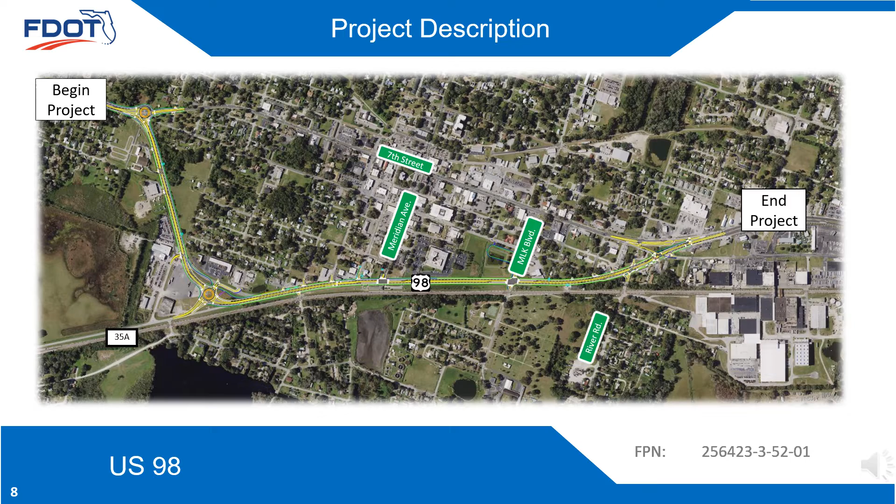The Florida Department of Transportation, FDOT, District 7, is proposing first to widen US-98, also known as the Dade City Bypass, from 2 lanes to a 4-lane divided roadway between 7th Street South and 7th Street North. Access to driveways and local streets will be maintained using similar connections to what exist in current conditions. The improvements necessitate converting the existing undivided typical section into a divided typical section, which includes incorporating new access management standards to promote safety and operations.

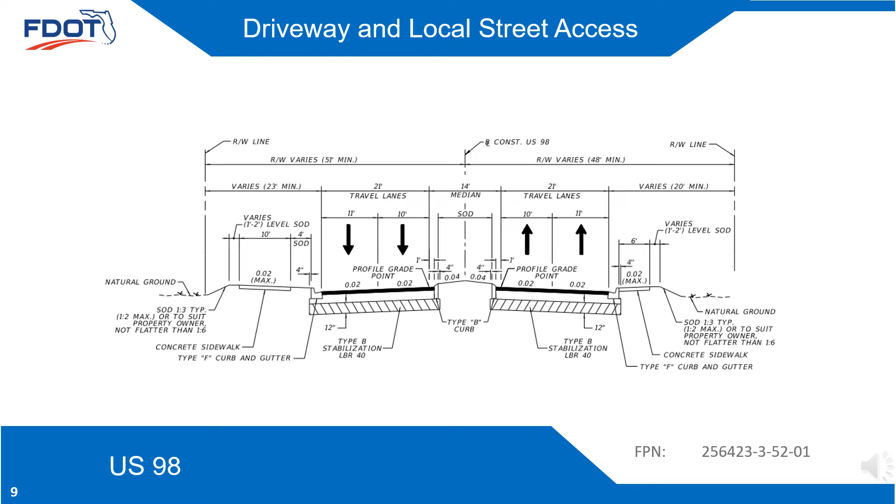Over the next few slides, we'll explain the proposed changes and demonstrate the northbound and southbound traffic movements. The orange arrows will represent northbound movements. The blue arrows will represent southbound movements. At the southern terminus of the US-98 bypass, the existing signalized intersection will be converted to a multi-lane modern roundabout. This configuration forces drivers to slow down and promotes safer operations for vehicles, pedestrians, and bicycle traffic.

East of the new roundabout, the US 98 bypass will be converted to a 4-lane divided typical section. A full access median opening with a westbound left turn lane will be provided at the eastern driveway of Calvary Assembly of God, and a directional median opening with a westbound left turn lane will be provided at Dick Jarrett Way.

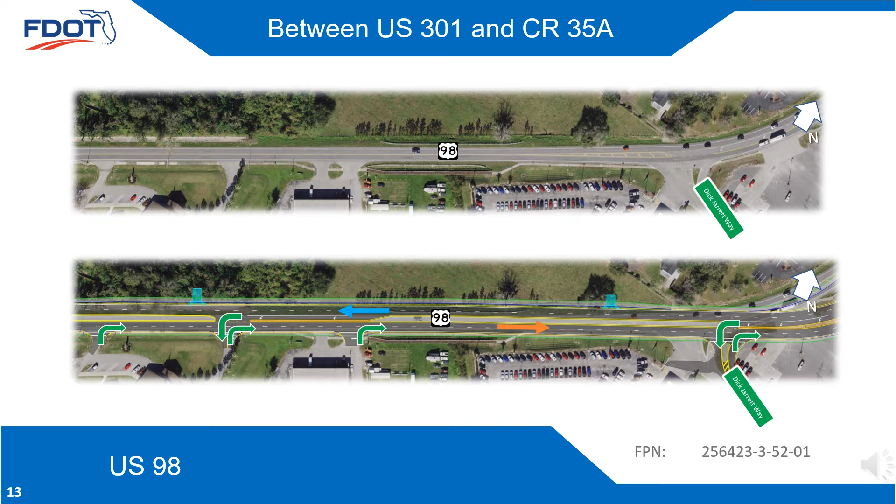At the junction of County Road 35A, Old Lakeland Highway, and the US 98 bypass, the existing unsignalized intersection will be converted to a multi-lane modern roundabout. All US 98 and County Road 35A traffic will navigate the roundabout in the revised condition to make movements. Similarly, business access from the west will utilize a new driveway that connects to the roundabout, so full access in all directions is maintained.

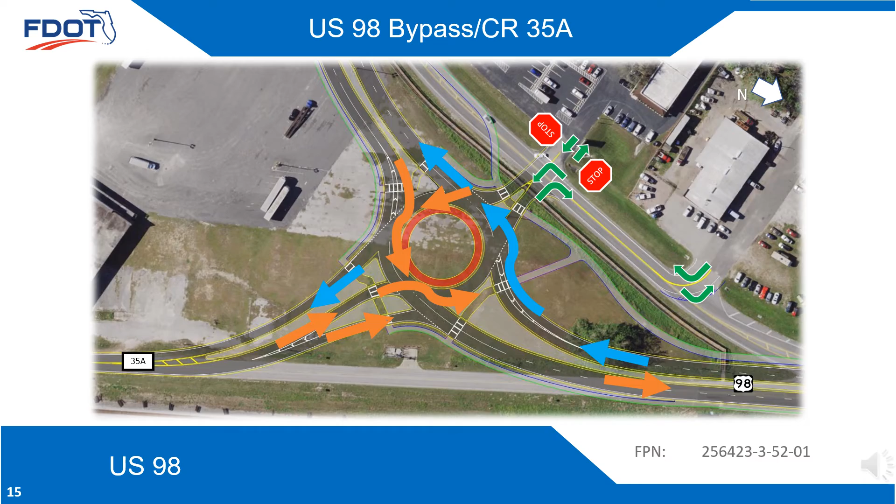North of the new roundabout, the US 98 bypass will be converted to a 5-lane undivided typical section. All existing full access connections are preserved in the new condition.

North of Church Avenue, the US 98 bypass will be converted to a 4-lane divided typical section through the Martin Luther King Boulevard intersection. Full access median openings with signals and left turn lanes will be provided at Meridian Avenue and Martin Luther King Boulevard.

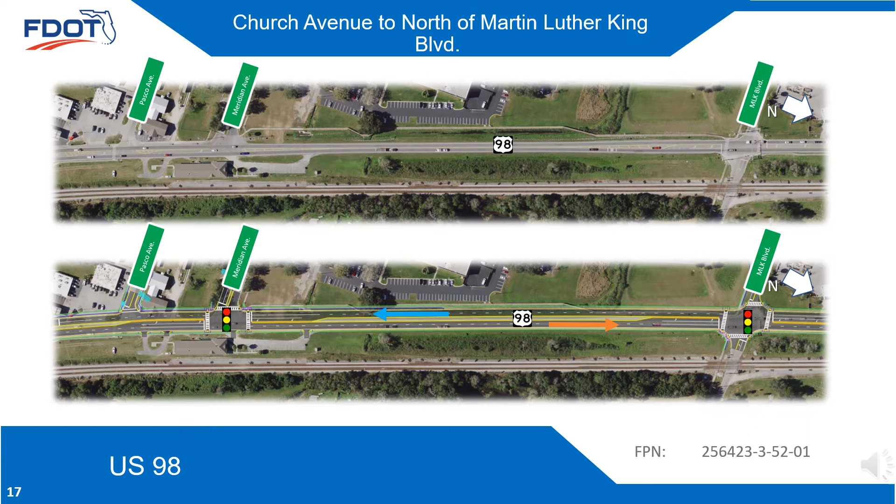North of Martin Luther King Boulevard to San Francisco Avenue, the US 98 bypass will be converted to a 5-lane undivided typical section. All existing full access connections are preserved in the new condition.

North of San Francisco Avenue, the US 98 bypass will be converted to a 4-lane divided typical section through the intersection with US 301. A directional median opening with a southbound left turn lane will be provided at River Road. Through traffic on River Road will be permissible, but left turns will be prohibited.

The existing US 98 bypass, 301, River Road, Whitehouse, Citrus County Drive, and 7th Street intersections will be expanded to accommodate additional capacity, and new signals will be installed to facilitate implementation of a partial restricted crossing U-turn, or RCUT, intersection.

An RCUT is an innovative intersection that reroutes left turn and through vehicles from the side road to reduce overall signal phase timing and eliminate conflict points within the intersection, thus greatly reducing travel times and enhancing safety. Movements are highlighted for reference on the slide, but generally speaking, the layout of the intersection maintains its look and feel to what currently exists.

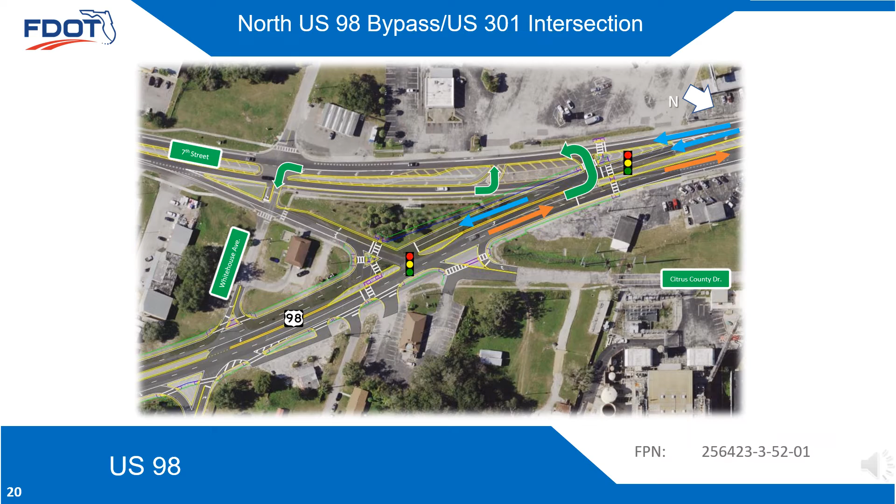The Florida Department of Transportation, District 7, is proposing secondly to widen US 98, creating a 4-lane divided roadway from the Polk County line to north of Townsend Road, and realign US 98 from north of Townsend Road to US 301.

The realignment allows US 98 to align with the Clinton Avenue, new State Road 52, intersection at US 301.

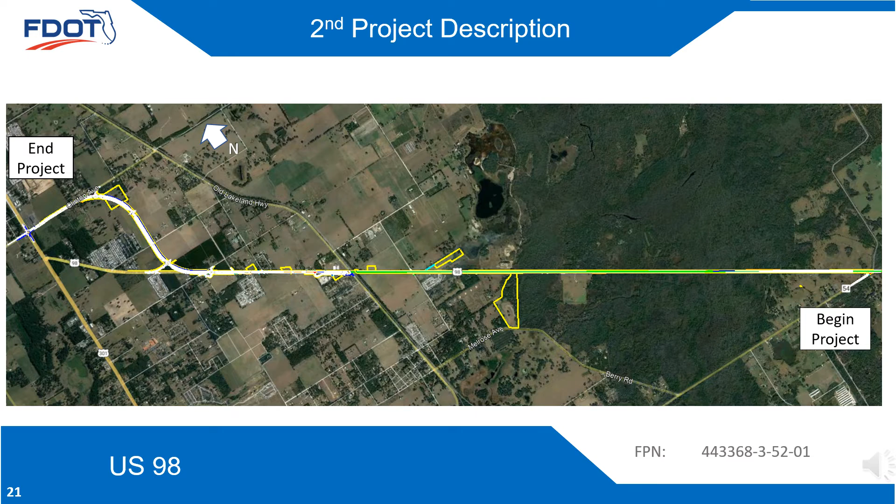As part of the roadway reconstruction, a median will be constructed that will limit the ability of motorists to make left turns. To facilitate left turns and U-turns, median openings, signalized intersections, and roundabouts will be constructed along the corridor to provide access to driveways and side streets.

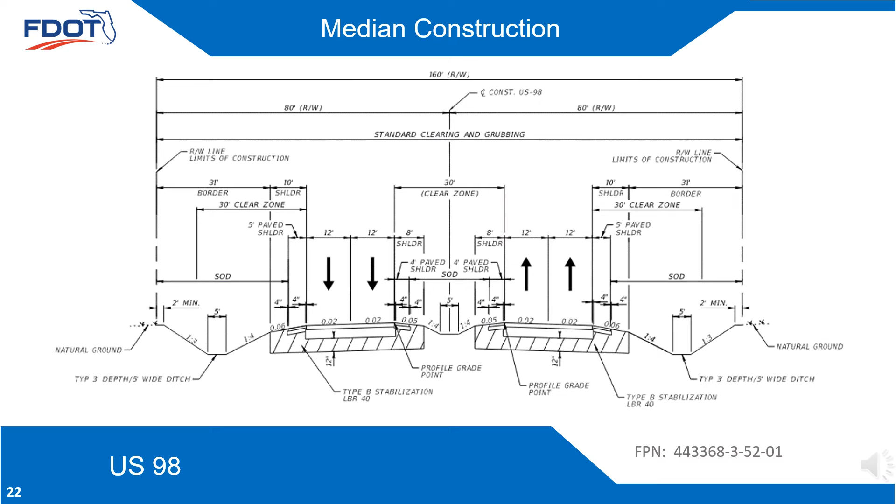Over the next few slides, we'll explain the proposed changes and demonstrate the northbound and southbound traffic movements. The orange arrows will represent northbound movements. The blue arrows will represent southbound movements.

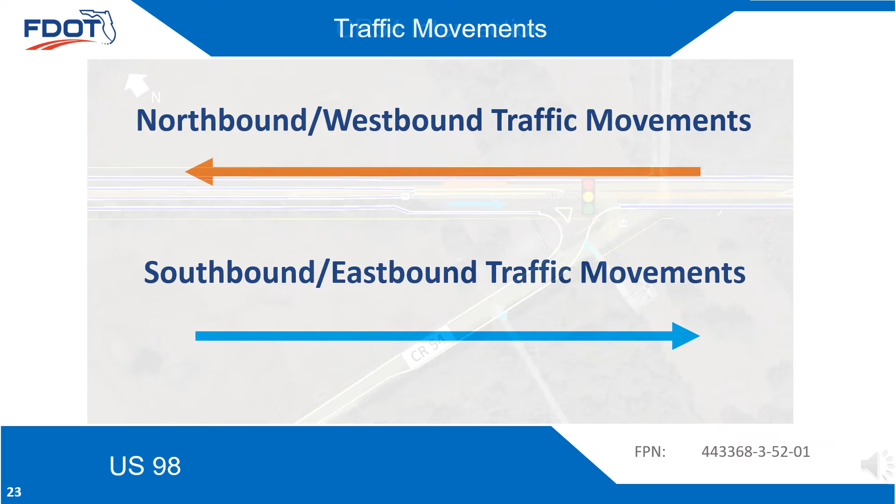At the beginning of the project, a traffic signal is added at the existing unsignalized intersection of US 98 and County Road 54, allowing traffic to safely make a left turn movement from northbound US 98 to westbound County Road 54, and from eastbound County Road 54 to northbound US 98, and U-turn movements along northbound and southbound US 98.

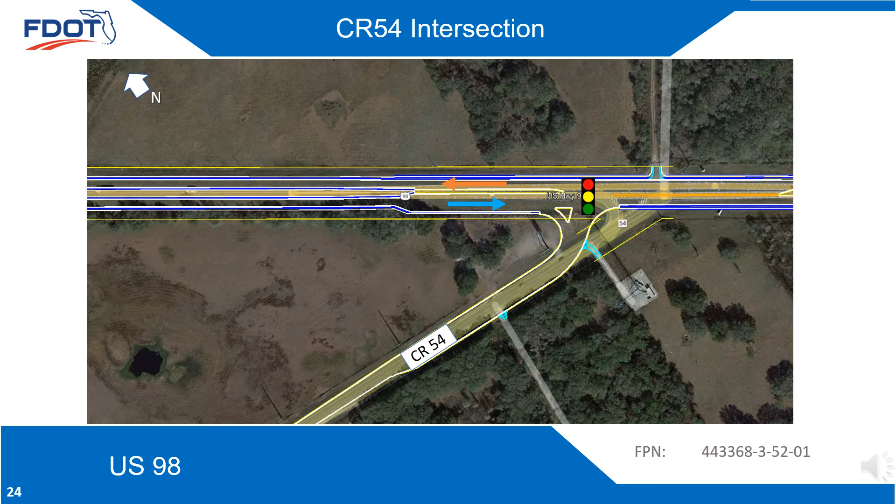North of County Road 54, as drivers approach the new bridge over the Hillsborough River, 2 full median openings are constructed at approximately half-mile spacings to allow U-turn movements for northbound and southbound vehicles to access driveways on the opposite side of the road.

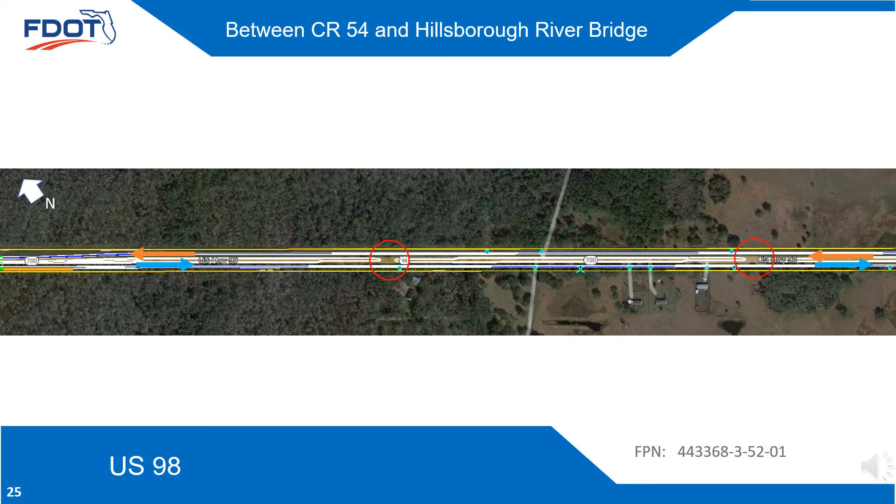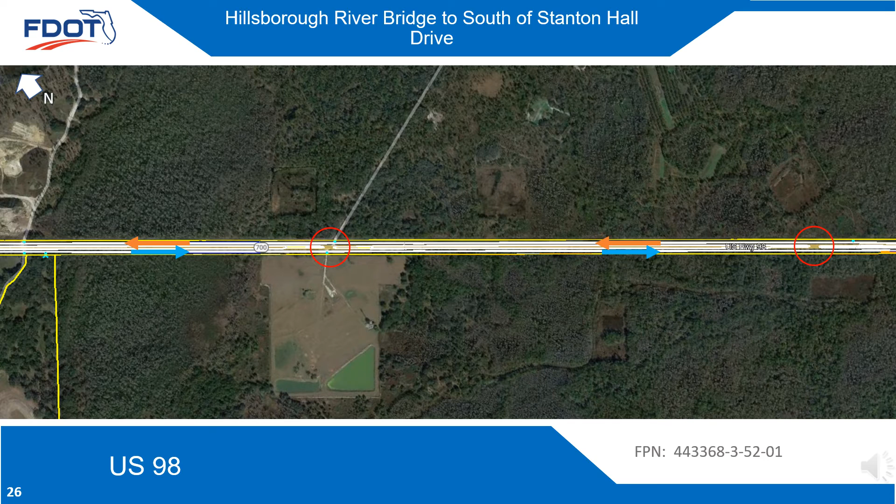Continuing north of the Hillsborough River, 2 full median openings are constructed at approximately 1-mile spacings to allow U-turn movements for northbound and southbound vehicles to access driveways on the opposite side of the road.

At Stanton Hall Drive, a full median opening is constructed to allow northbound US 98 traffic to turn left onto Stanton Hall Drive, and traffic exiting Stanton Hall Drive to turn left onto northbound US 98. Accommodations for U-turn movements for northbound and southbound vehicles to access driveways on the opposite side of the road are also provided.

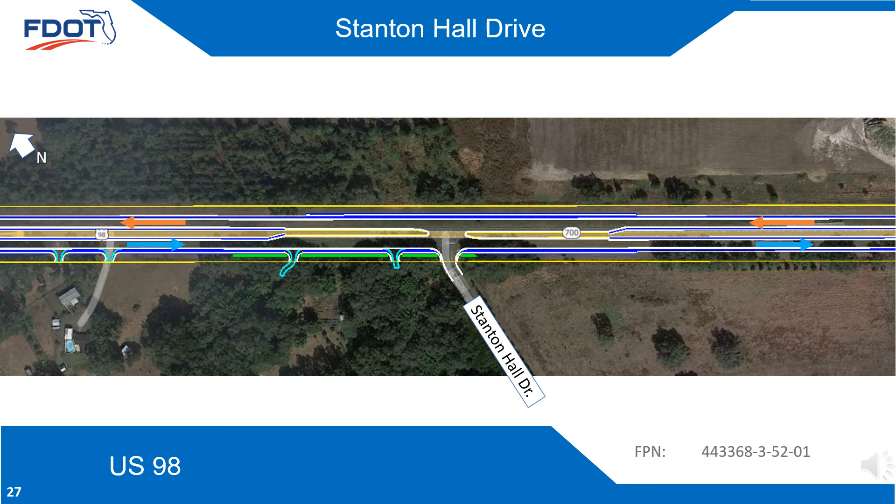At Citrus Hill RV Resort, a full median opening is constructed to allow northbound US 98 traffic to turn left into Citrus Hill RV Resort, and traffic exiting the RV resort to turn left onto northbound US 98. Accommodations for U-turn movements for northbound and southbound vehicles to access driveways on the opposite side of the road are also provided.

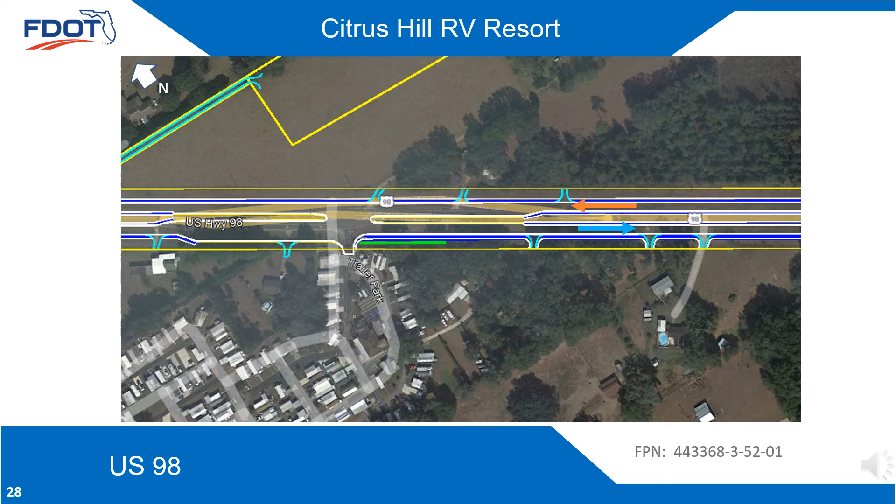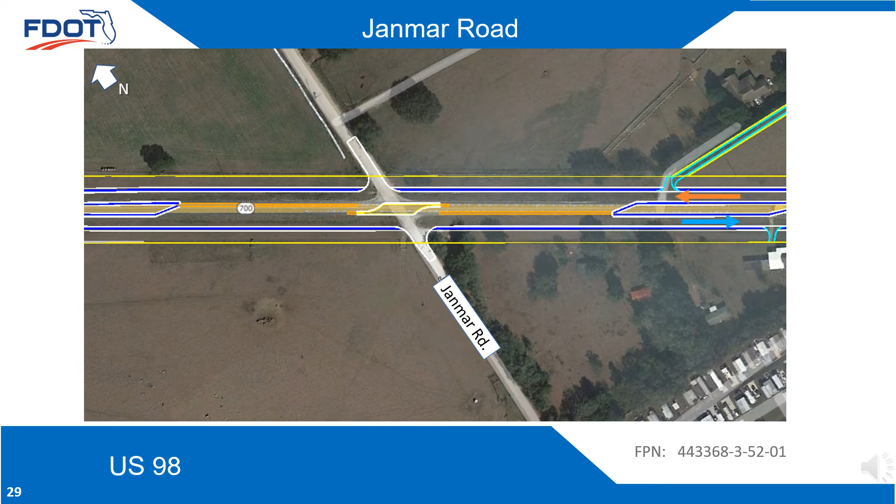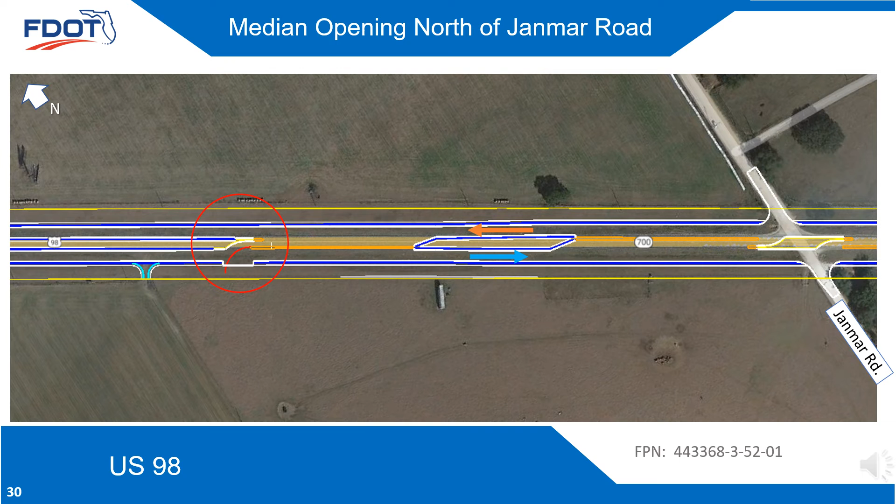Approximately quarter-mile north of Janmar Road, a directional median opening is constructed to allow northbound traffic on US-98 to make a U-turn.

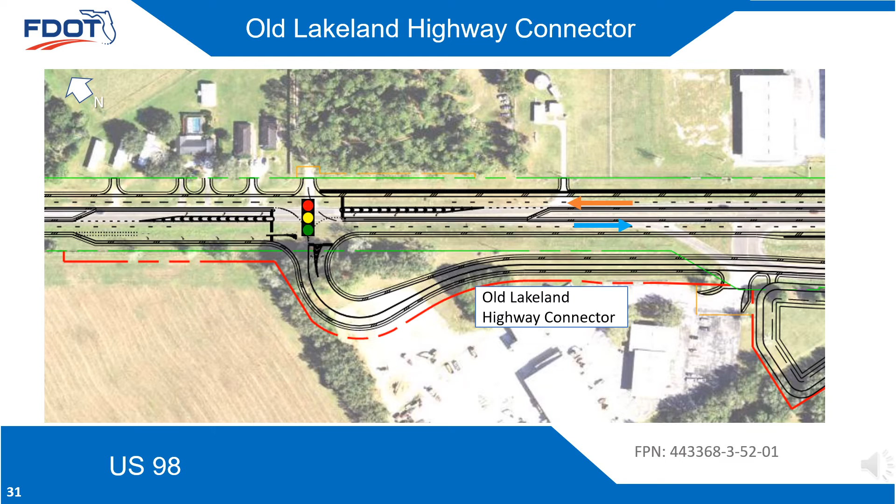Approximately quarter-mile north of old Lakeland Highway connector, a directional median opening is constructed to allow U-turn movements for northbound and southbound vehicles to access driveways on the opposite side of the road.

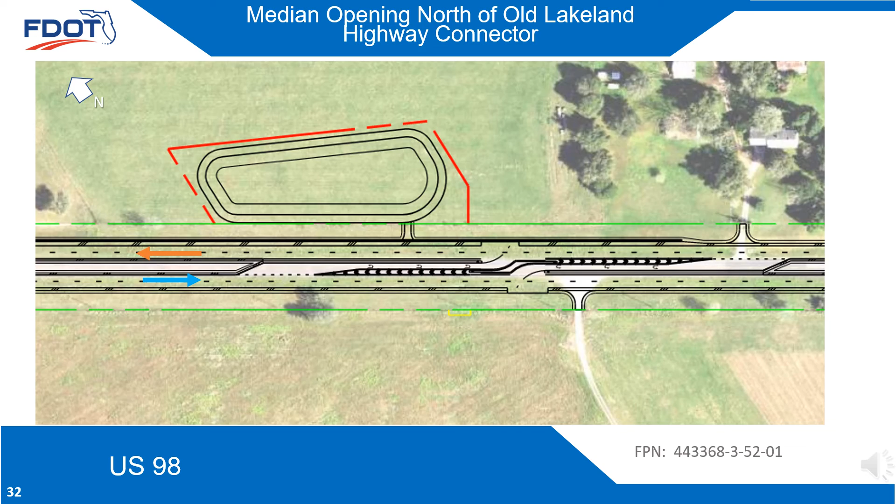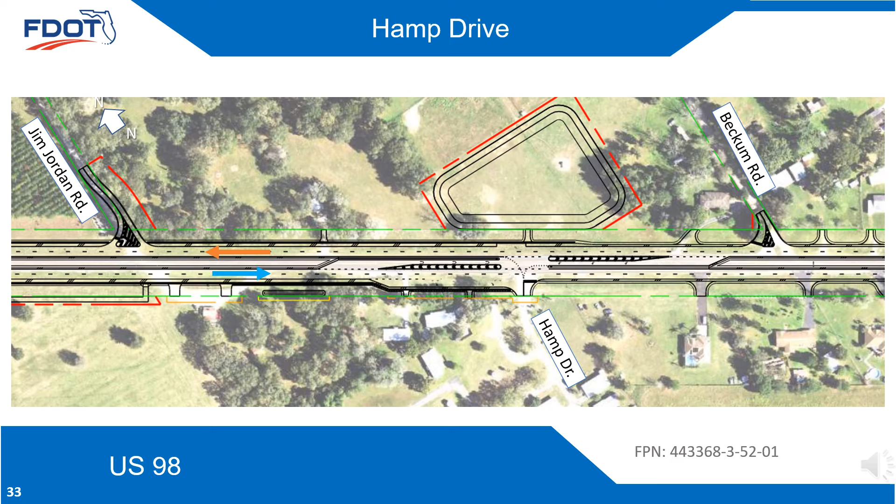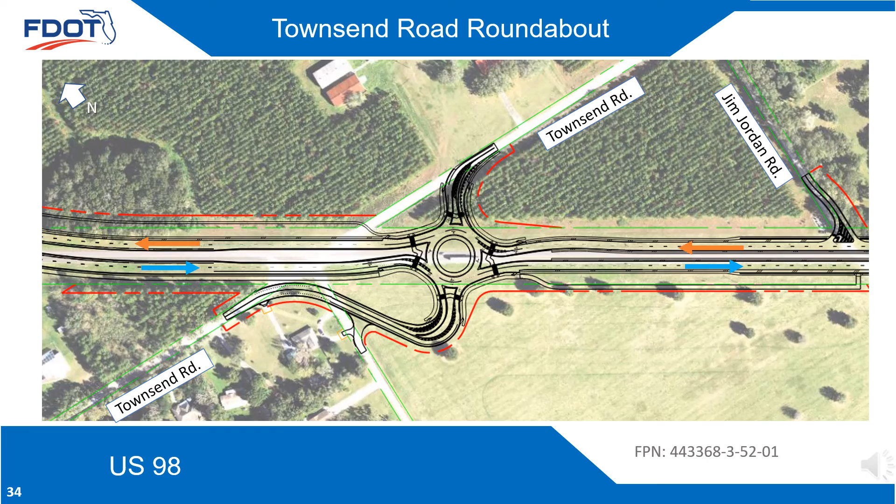North of Townsend Road, US-98 is realigned into a new 4-lane divided road in a more northern direction. The connection to the old US-98 is reconstructed as a modern multi-lane roundabout. The roundabout is designed to accommodate a future connection to new development, Crosswinds, on the east side of US-98.

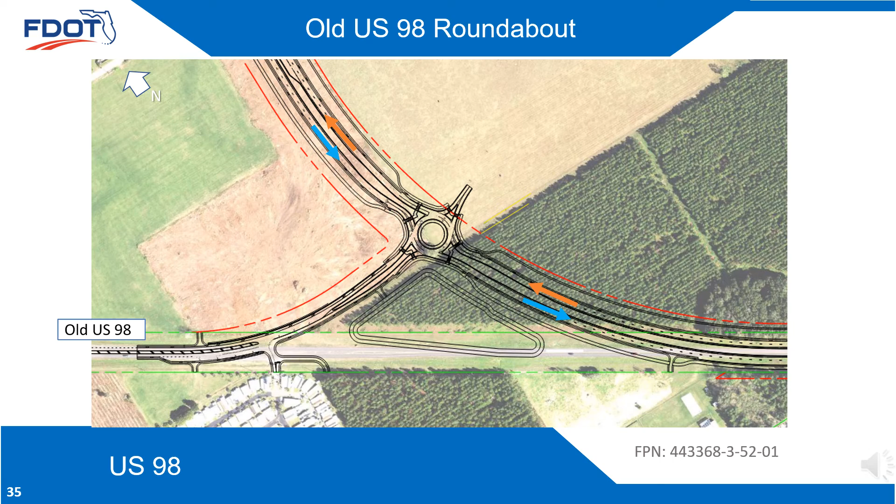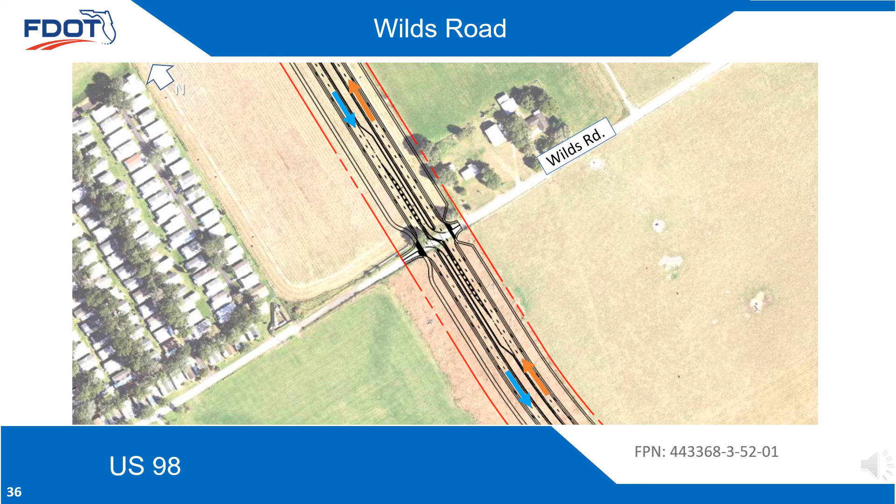Approximately quarter-mile north of Wilds Road, a directional median opening is constructed to allow northbound US-98 vehicles to make a U-turn movement.

Further north, a modern multi-lane roundabout is constructed to provide connections to a new development, Crossroads, on the east and west side of US-98.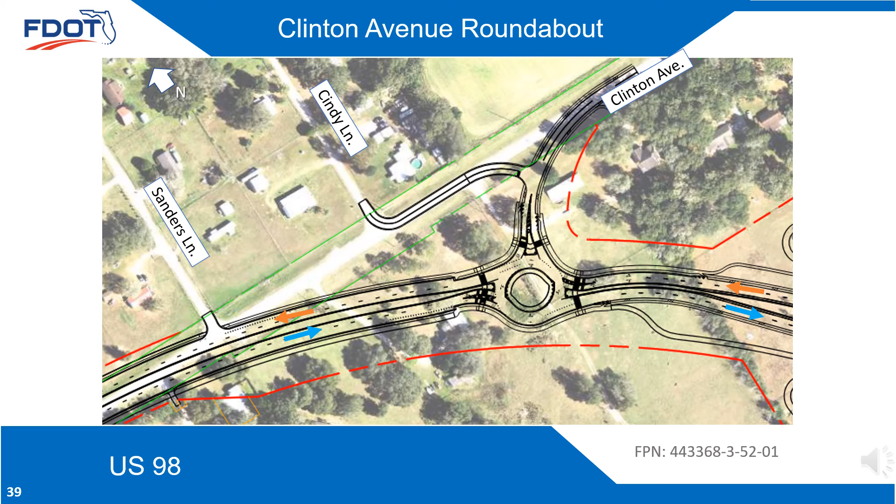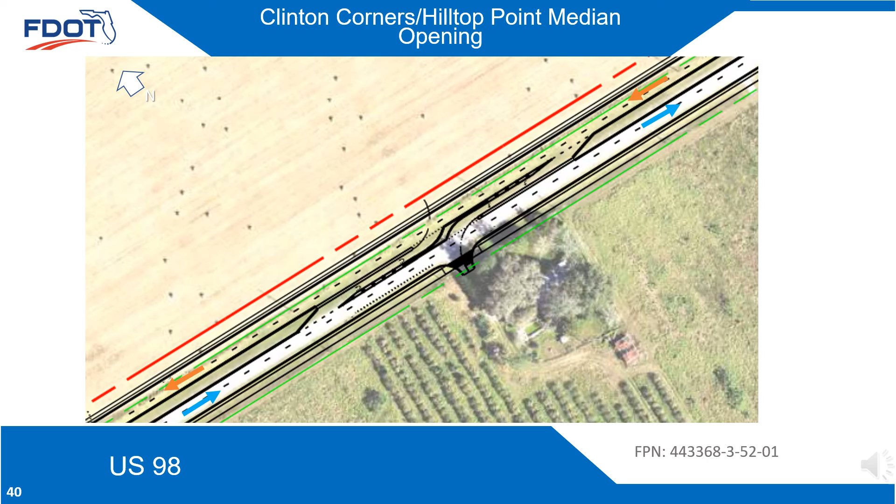The existing western directional median opening at the shops of Dade City will be closed. Traffic entering US-98 from the shops of Dade City will be able to turn right onto US-98. Eastbound US-98 traffic entering the shops of Dade City can still access the shops of Dade City via the eastern median opening.